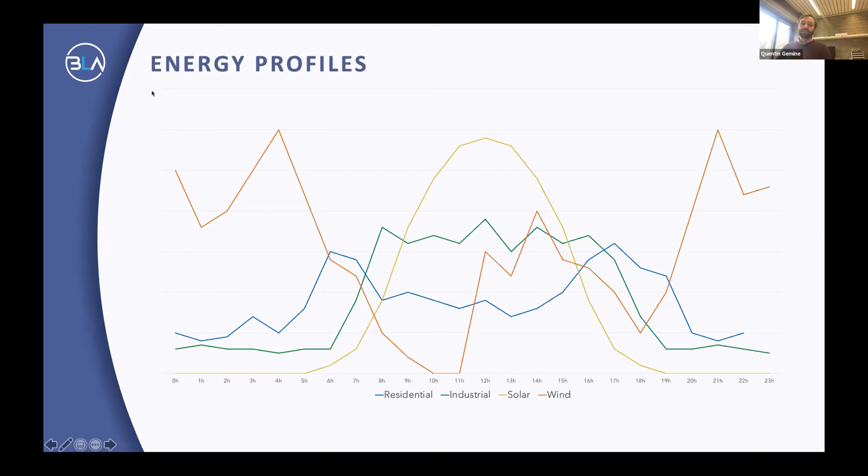Optimizing the behavior can be defined in different ways. Here in the presentation, I will consider that what we want to do is really minimize the sum of electricity cost of all the community members. So you take the energy bill of every member, you take the sum of all these bills, and you want to minimize this amount of cost.

So here we have a formula that is the sum of cost that we want to minimize. I will briefly describe this formula. First we have the sum over time and over all the community members of a first metric, which is actually the supply and grid import price — the price per megawatt hour to get energy from the grid — times the consumption of the grid user minus the community import.

So you remove from the imports from the grid the import you got from the community, and these first two terms multiplied together are what you pay for getting energy from the conventional grid. You also have another cost component, which is the community import price times the amount of energy you import from the community. So one term for getting energy from the grid, and another for getting energy from the community — these two terms fall within the cost category of what you want to optimize.

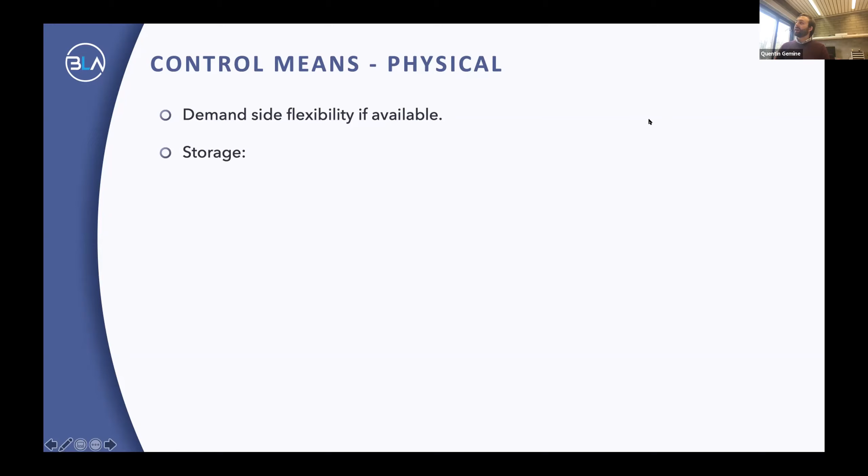So at the beginning, for example, if you have around 50% state of charge, you can both charge and discharge. But as you charge and put more energy into the battery, you will reach the maximum amount of your battery, and you will first have to reduce the amount of power you can put into the battery, and then you will reach, of course, 100% state of charge. You will not be able to use this asset anymore at that time to increase your consumption or to store renewable production.

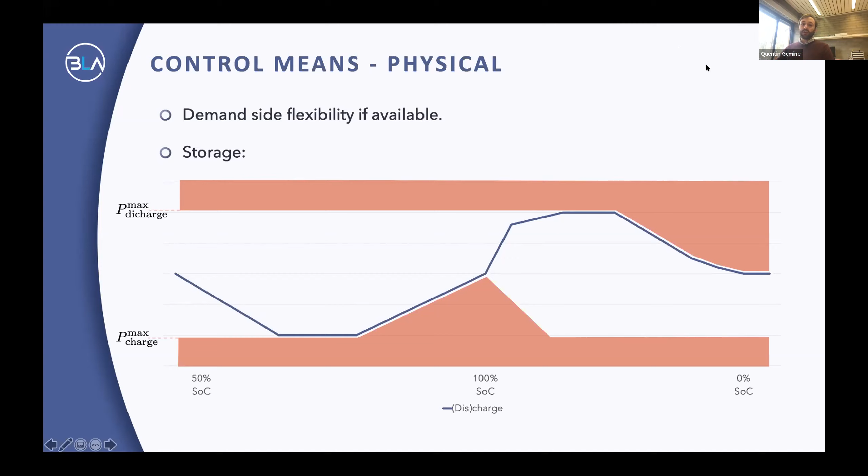And so then, of course, you will be able to discharge your battery and bring energy out of it. At the beginning, you can reach maximal power discharge. But again, over time, as you are getting closer to 0% state of charge, you will reduce your power discharge up to the ultimate point where you don't have any power anymore in your battery. And so it is complex. Why? Because decisions that you take at some time will impact the kind of decisions you will be able to take later on for managing your grid. It's quite a complex flexible asset.

But we also have some virtual control means within the community. So what are they? Basically, it's how you want to allocate your local energy among your community members. And it is virtual because it only affects the metering data. The production process and the consumption process are there, but you decide to match some local production from a specific grid user within the community and say, okay, a share of its production is exchanged with another user, and you virtually update the meters to consider that a part of this energy was exchanged within the community and not through the conventional grid.

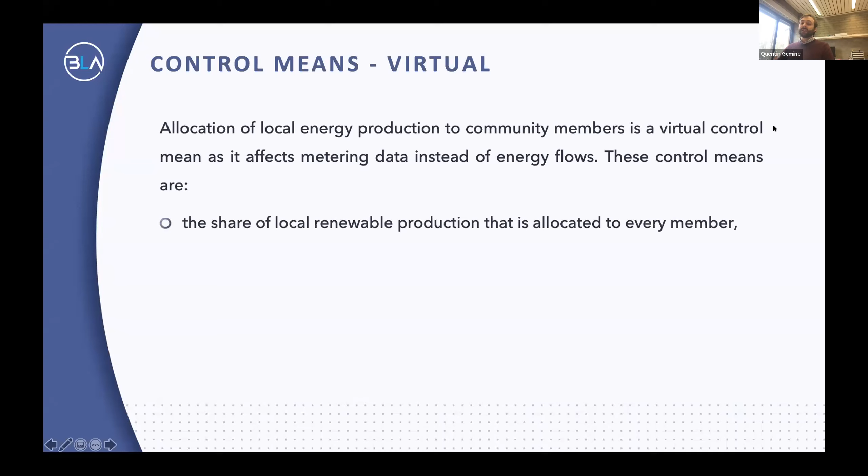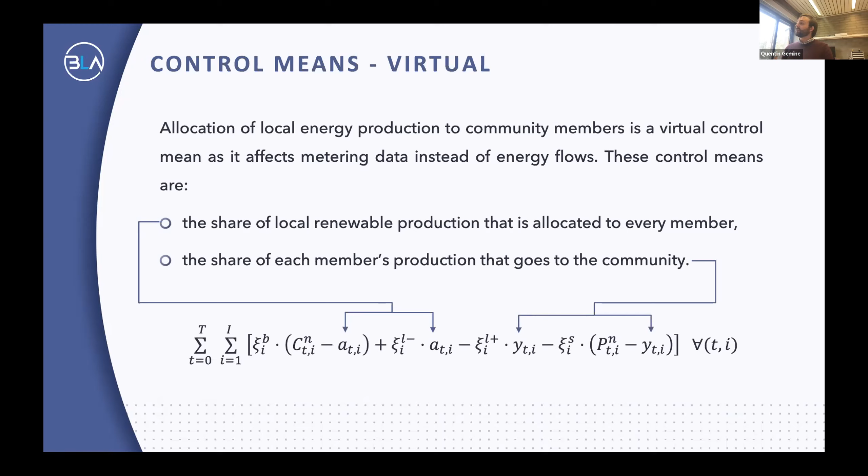And so these control means are, of course, the share of local renewable production that is allocated to every member. Within our equation from before, these are actually the A. So if you decide to allocate more energy to a community member, you decrease its consumption as seen from the conventional grid, from a metering point of view, but you increase, of course, the amount of energy it brings from the community. And there is also the share of each member's production that goes to the community and not to the conventional grid. That's the other decision variable here, and it can again change the production as seen from the conventional grid. So you have P minus Y here to decrease your production, and of course, there is a new term that is the one you are sending to the community.

And so about the optimization, the optimal control you want to apply to manage your system in an optimal way, you can do it in two steps. First, you want to plan both physical and virtual control means under uncertainty, eventually in a receding horizon approach. So what does that mean? First, you will optimize all these terms. You are under uncertainty, and you will say, okay, I forecast that my system will go in this direction. I will optimize my physical control actions, so I will update consumption and production variables by changing the behavior of my users using physical control means, but I will also consider that I can update my virtual power exchanges to really optimize the value of the whole cost function here.

That's the first step. And then, depending on the regulation, of course, you may be able to run an ex post optimization of the virtual control means as soon as you know with certainty all the energy flows. The virtual control means, so the share of energy that you bring from or to the community, is virtual. So you can change it afterwards for metering purposes, for example. You will not be able to alter your consumption and production anymore, but you will be able to play again with a few other decision variables as soon as you know with certainty all the energy flows within your community.

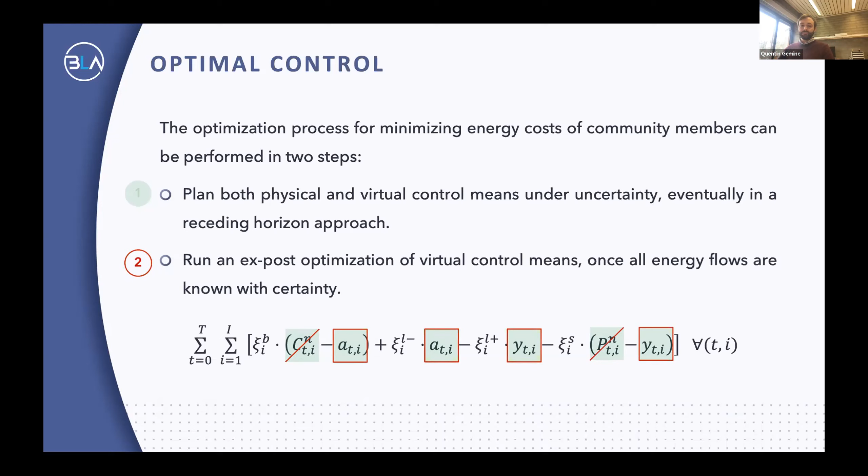And so I will speak a bit about AMEO here. AMEO is a software solution that we develop at Blacklight Analytics, which is dedicated to the advanced management of energy data and operation.

It can collect energy data from many sources, run many kinds of data processing steps and operations, and run forecasting and decision-making algorithms. Managing energy communities really falls within the scope of this solution, because it's really about getting data that describe your community members and taking decisions to optimize the technical and economical operation of your community.

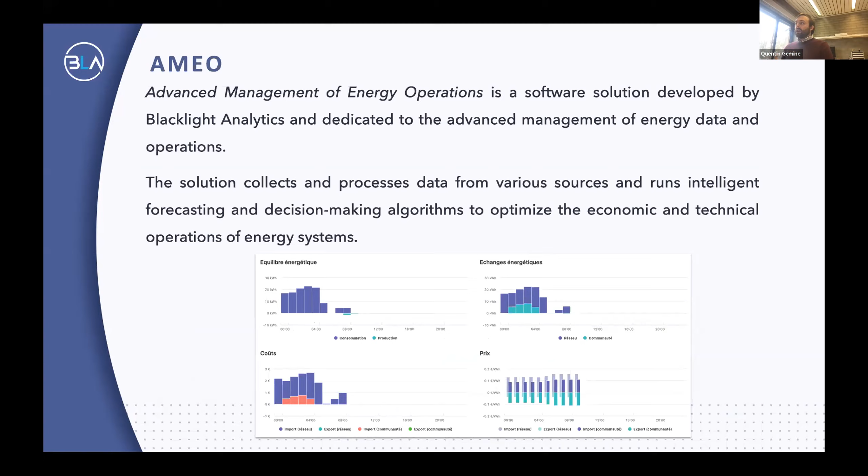So how do we organize and represent a community within AMEO? Well, we have a community within which you have members. A member can be a very simple member with only some demand, but you can also have a prosumer member that has both demand and production, or even more complex ones that have demand, production, and a battery, a storage system, which itself has other behavior and processes like charge, discharge, and state of charge. And you can also have many members, of course, in your community.

As soon as you model and account for all these members and processes within AMEO, you can perform active community management, really make the optimal control work. You take all the demand and production processes, as well as the state of charge of your batteries over time. First, you run a learning algorithm on your demand and production behavior, and you take the learned model and the last known values of demand and production and send them to a forecasting step that forecasts the evolution of demand and production for all members within your community.

This feeds an optimization step that uses these forecasts and the information it has about the current state of charge of your storage system, and outputs decisions, such as physical control means like charge and discharge that are really effective at the current time. And of course, some virtual control means that are for now only the expected local production shares, because you will potentially be able to change these virtual control means later on, ex post. So these are just expected values that will be updated as soon as you have better knowledge about your system in the future.

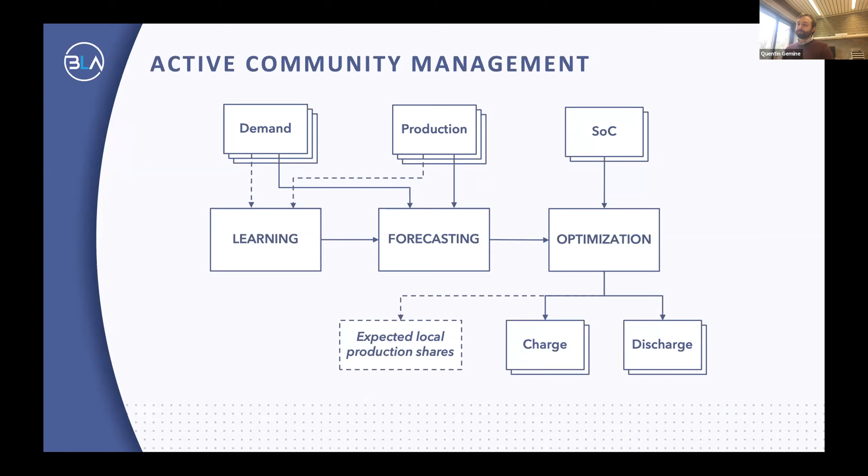This ex post optimization takes again the demand and production processes and runs an optimization step. The difference here is that it does not require forecasting, because it knows everything. It runs ex post, so it looks at past data that is available. It will slightly update and re-optimize the local production shares you computed, and so it gives you the definitive local production shares allocated among community members using the known, certain consumption and production data of all your members.

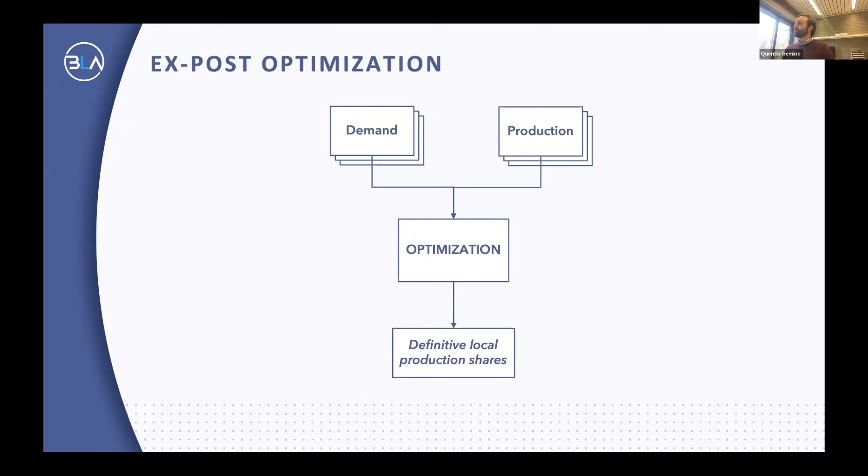This, of course, calls for a lot of R&D and innovation to make energy communities work, and to make them work well in particular. We of course have machine learning. Machine learning is one of the cornerstones of this solution. Why? Because you need to learn and understand how the demand and production processes will evolve over time and in the future, in particular to manage your community optimally.

You have optimal decision making under uncertainty. Here it's really about taking decisions for an expected, forecasted state of your system, not knowing with certainty what you will get, but taking decisions that are optimal even though there is some uncertainty in your system. Of course, it can be built on top of machine learning algorithms and applied mathematics. There are a lot of solutions for that, but it's quite a challenging R&D topic too.

And the last one, somehow related to the two others, is optimal bidding. Why optimal bidding? Because optimizing self-consumption or energy exchange is not the only way to optimize the energy bills of community members. You can also, as a community, decide to interact with energy markets and procure energy at some cost. And these costs, you want them, of course, to be as low as possible.

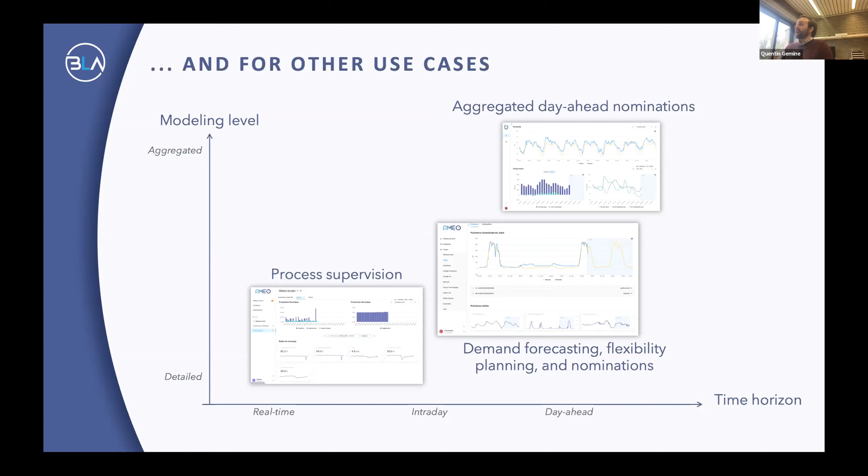As soon as you become an active grid user, you can participate in energy communities, but you can also have some new way to consume, some new way to react to price signals, to play with markets, commodity markets, flexibility markets, and to offer services to grid users. And so it's really a lot of R&D topics that are very useful for managing energy communities, but also for the energy transition in general and for a grid user becoming active, which is really a big topic right now.

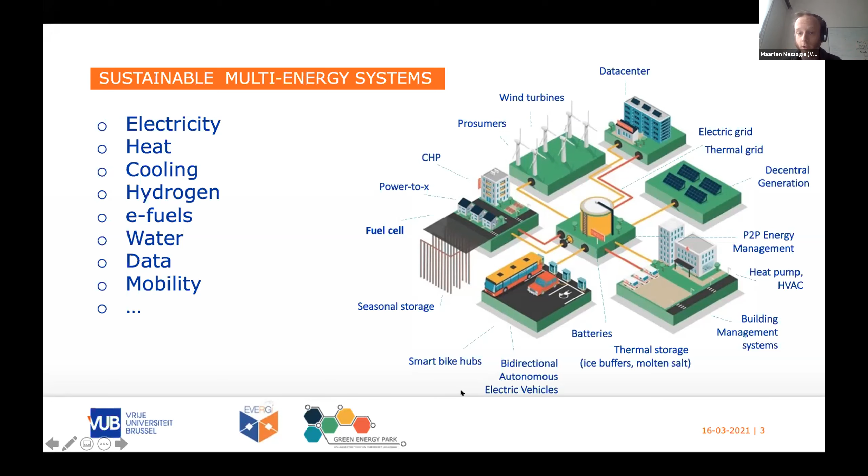Our research focus is actually on the system level and on the interdisciplinarity of it. So we are not only engineers engineering the technology together with industrial partners, but it's also from a socio-economic point of view, from a sustainability point of view, and so forth.

What we directly saw is what we need, and this is also what we saw from being very active in Horizon 2020, the European context. And also from there, we saw that even more so for, back then, the draft versions of Horizon Europe, the TRL, the technology readiness level of these projects goes up. And there is really a need, like we heard in the introduction, to showcase and demonstrate single components. So if we want to be relevant in the future in Europe as well, we need demonstration zones. So we need to build a demonstration living lab.

And for us, on top of that, the knowledge that we would bring lies, in general terms, in data-driven analytics, like we have seen in the previous presentation. It's a huge issue that can solve not only energy management questions, I believe, but many other research questions we would have. So a database and monitoring platform on top of this demonstrator living lab, with a lot of user experiences, is really needed. So early on, in 2018, we understood that this is something we would like to build and really needed to sustain our further research as well, obviously.

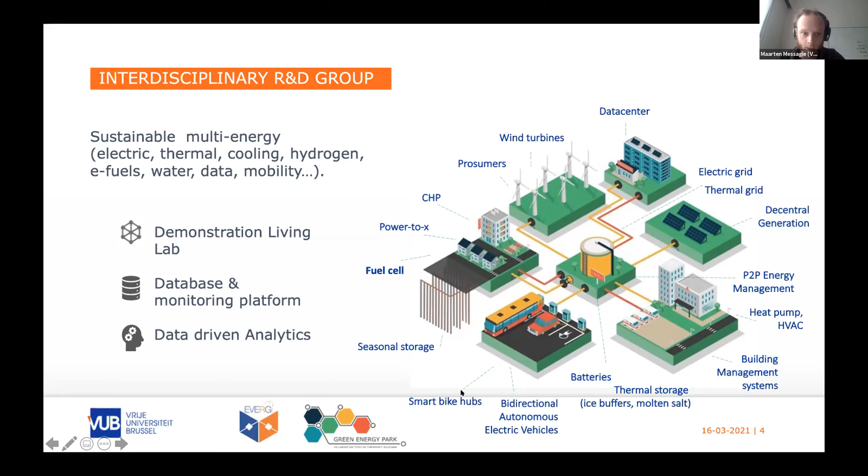But it's not only about that. We can build a living lab, then we have all the hardware, let's say, all the copper in place to play with. It's not only about that, of course, an energy transition in itself also needs a co-creation ecosystem.

And that is why, early on, two years ago, we as a university set up this company called the Green Energy Park, to help this energy transition not only from a traditional research and development point of view, classically your TRL, technology readiness level, from 1 to 6, but really helping close the gap toward full demonstration on the market, which is TRL 9.

The point is that we've seen beyond TRL 9 there is also a great need. We can build super complex systems with data-driven algorithms, IoT, and so forth, but then we also need technically skilled people able to install these components, and secondly, someone who can maintain and restore it if something happens.

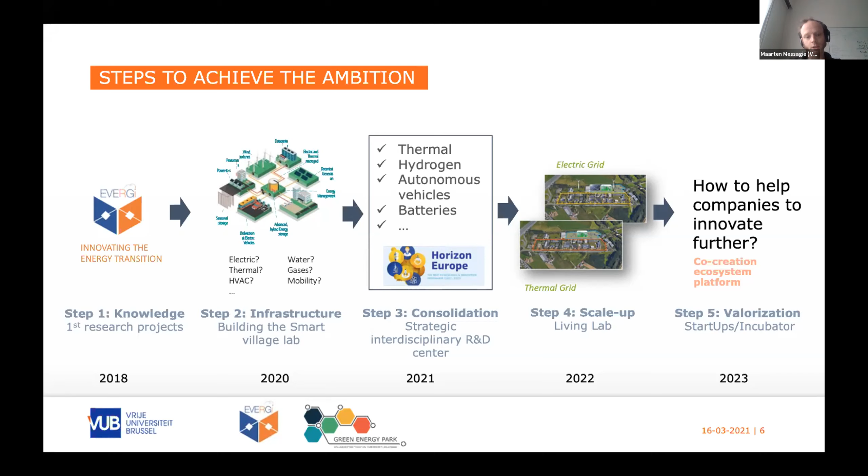So these are the steps we're taking. It's very much a stepwise approach, of course - you try something, you learn, you adapt, and you take the following step. Interesting to see, maybe, how we did that from 2018 onwards. Yes, we can see that in this slide.

We started with doing 6 smaller projects called feasibility studies, together with Flux50 and Vlaio, the regional scientific fund. This really gave us the confidence to invest in research activities one step further.

Later on, we acquired several Horizon 2020 projects like Renaissance and Interconnect. We had many pure R&D projects, icon projects as they are called. Then we also started writing the first Interreg and EFRO projects, which is actually more on hardware. This was the foundation for building that first piece of equipment, the 1 megawatt lab.

During 2018 to 2020, we grew from 4 FTE to 30 FTE at the university in this research domain, in this research group. Very good is that we could start this non-profit organization, the Green Energy Park, to foster even more collaborations. This was a big step for us to convince the university to take that. It makes it less risky for a university to take these kinds of steps.

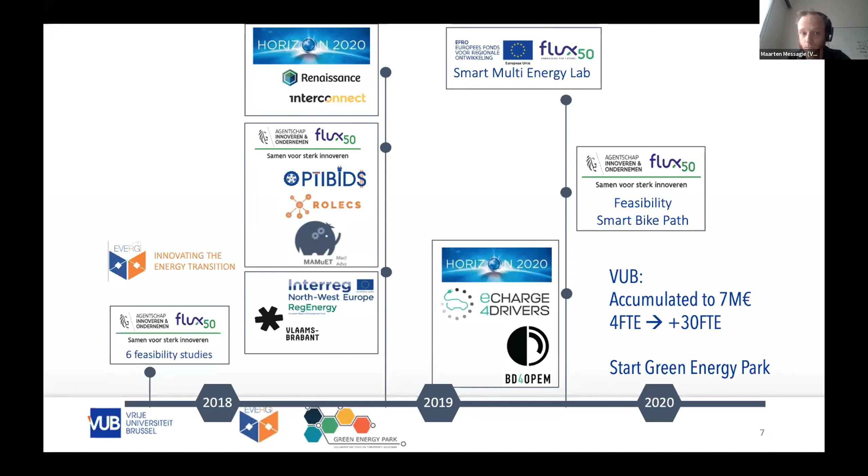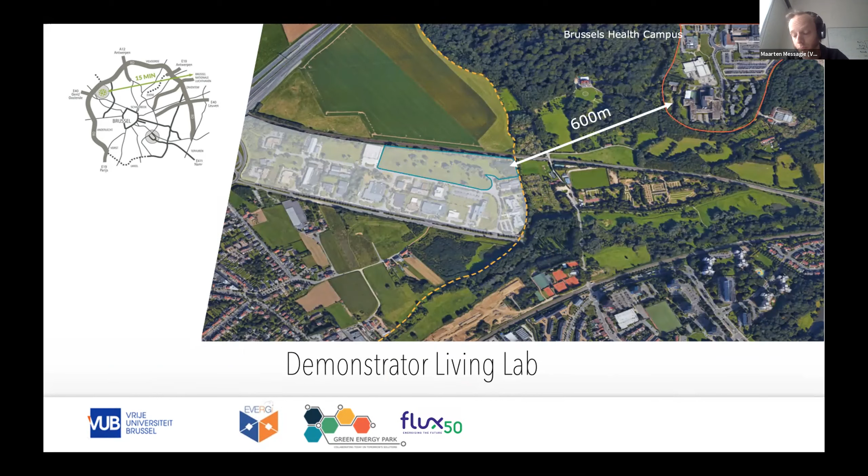What we are building today is the first version of the lab, called the Smart Village Lab. This is the small first step, a 1 megawatt installation. It contains 4 different batteries of different technologies, containerized solutions.

It contains three houses that are fully equipped with what we call the smart home lab, equipped with the newest technologies that you would use at home to heat and electrify parts of your household. This village has a parking lot in the middle, for bi-directional and smart charging things that we would like to test.

Everything is on top of every building. There are solar panels, and a new power distribution grid to be installed. There is a control center where we can showcase new versions of, for instance, EMSs, peer-to-peer constructions, or energy coins that are steering this little prosumer market.

This is an open experimental lab that can be rented by others, with other partners in research projects. The aim is that you rent here, let's say, a square meter to park a car that you would like to connect to battery 3 for a very specific test.

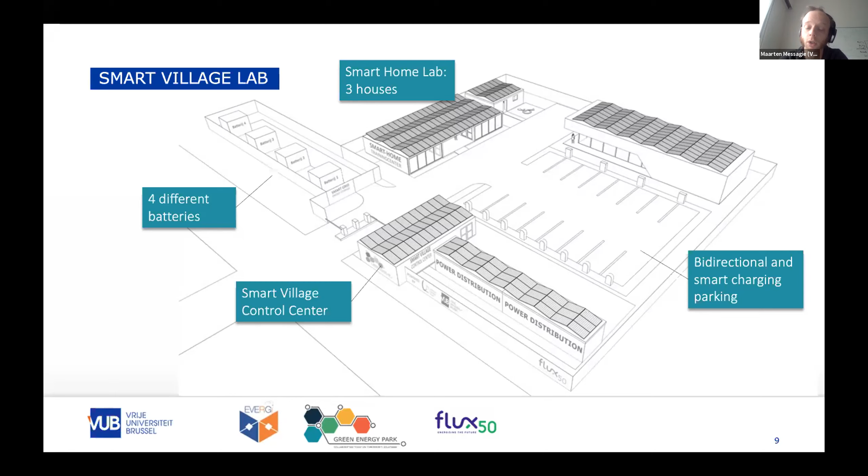And then we would schedule this in a calendar and see when we can conduct that test. So this is a first setup to showcase that we are able to make such a small living lab, that we are able to steer the components. The step beyond this, as I said, this is 1 megawatt. The step beyond this is the full site that we see here. This is really the living lab that we intend to build.

This is a 20 megawatt installation with today 21 buildings connected, with 70 different companies requesting energy. The aim is that there will be a local energy community here, a prosumer market, so that these companies can interchange energy. First of all, that's electricity, because there is already copper installed here.

That's easy. But of course, in the future, we also see this as exchanging on a prosumer market heat and cooling between different buildings. Of course, to build this, there are a lot of extra funds needed. So that's why the previous step was very important, to really prove that we are able to do this.

The small orange area that you see here is the Smart Village Lab, on the blue ground that we have acquired here as a university.

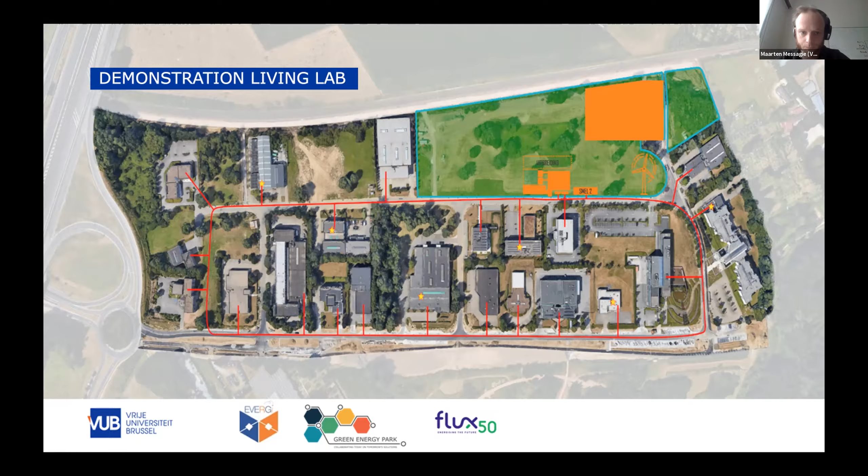Later on, what we are really after in this living lab, of course, is to try to understand the user experience, to understand all the data that is generated by these users, and to try to understand if we can learn something from that and how to help industry with it.

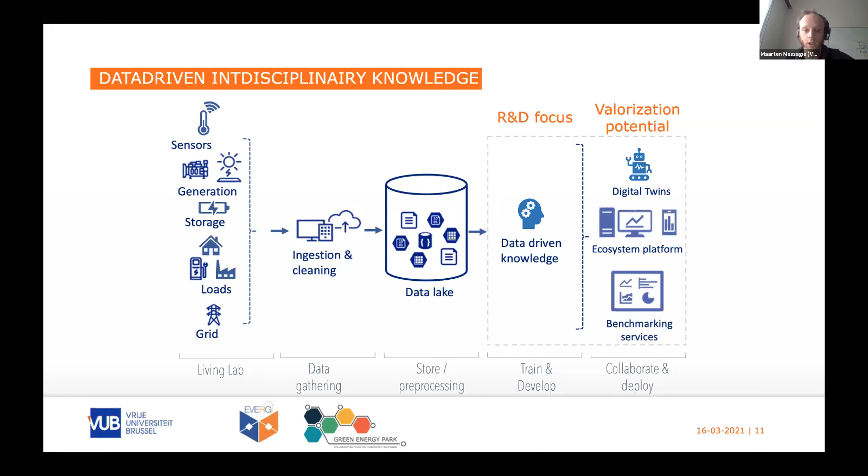So in that living lab, obviously there will be a lot of IoT sensors. We are already installing some of them today. It's all about data gathering and large big data bases, of course. As an R&D center, what we can help with is this data-driven knowledge and how we collaborate today already, and hopefully more in the future. It's about setting up, for instance, ecosystem platforms, digital twins, and other kinds of services.

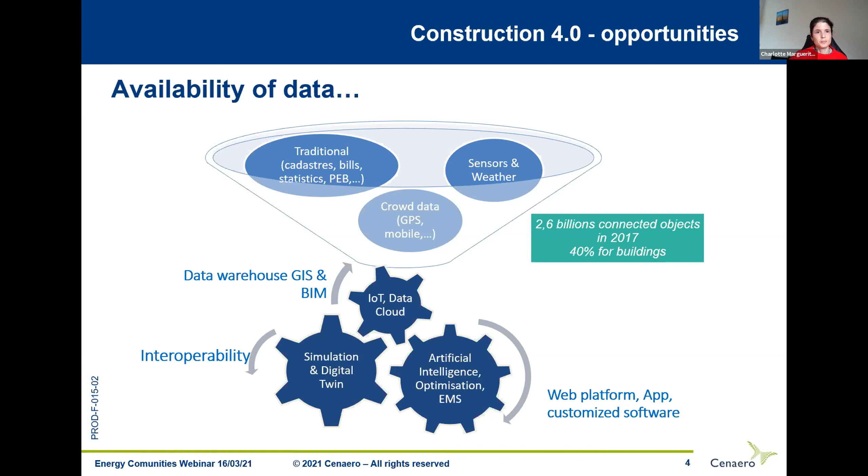This availability of data can be combined with design and operation tools, smart technologies like blockchain technologies, IoT optimization methods. We can, for example, think about building energy models that can be fed with real-time data to create digital twins. This can really help in the operation in a very efficient way of buildings, and combined with energy technologies and, as we talked before, energy management systems.

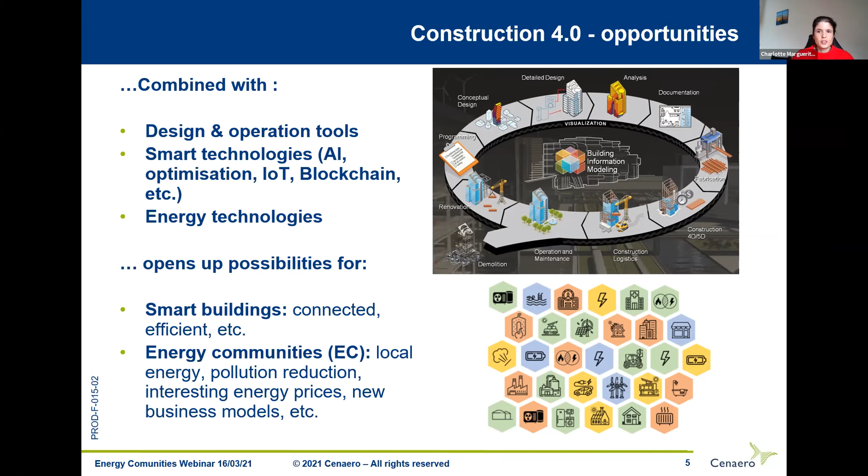This opens up possibilities for more smart buildings and energy communities, which are connected, efficient, and can use multi-energy sources. This gives good advantages like helping reach the energy goals for the future, but also, let's say short term, interesting prices for consumers, for example. With the combination of data and tools, we can have almost endless combinations of energy sources and buildings at the community level, so this has to be managed in an efficient way.

In Wallonia, we are involved in Cenaero in this big project, which is the Wal-e-Cities project. In this project, the objective is to develop innovative citizen-oriented solutions in different topics: mobility, energy, environment, governance, etc. This project is based on data and innovative solutions to create innovative ecosystems, to help in developing new technological breakthroughs, to help in societal challenges, and foster startups in Walloon companies.

Within the Wal-e-Cities project, we have different demonstrators. On this slide I just put a few of them because we have much more, and I will focus for the rest of the presentation. I will give an overview of these projects, these demonstrators, which are in different parts of Belgium, at different levels, from buildings to energy community and to city level. A lot of data is involved, so it's data-driven and energy model-based methods that will be developed for operation control strategies, but also to propose improvement scenarios for the different energy systems.

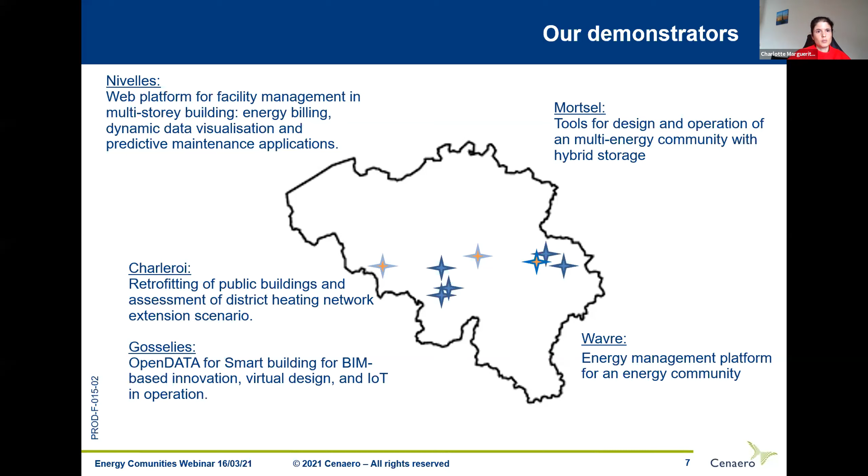So now I will go into the different projects. The first one I want to present is the Smart ACC with a study case in Wavre. So in this demonstration, we want to grasp in real time the challenges and advantages of an energy community compared to traditional energy production and distribution structure.

And compared to that, now we want to move to an energy community structure with a diversity of energy sources and consumers. So we can have traditional houses, commercial centers, schools, or hospitals, for example, with different types of energy needs. We can have producers, we can have consumers, and this involves bi-directional energy flows and, of course, high flexibility of demand and production.

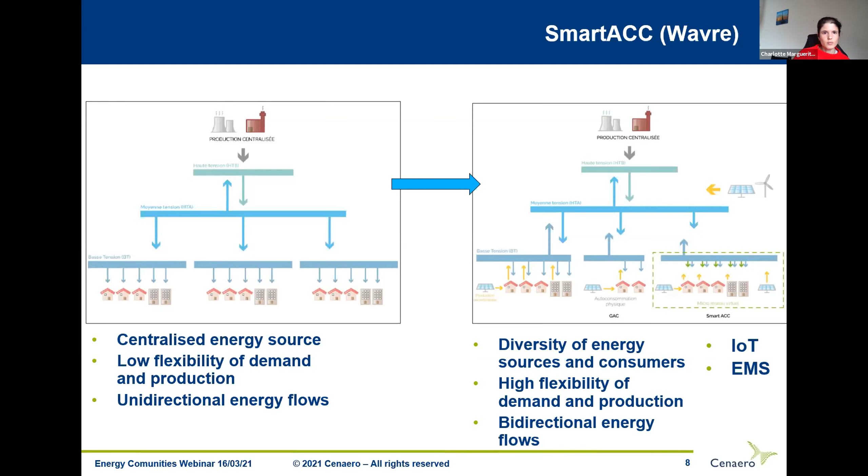Within the energy communities, we will have a lot of IoT data coming from different sources. And this data will be used in an energy management system to help in managing the operation of such a complex community. In the Smart ACC project, the demonstration is located in Wavre and composed of different types of consumers. So we will have residential buildings, tertiary buildings, and also commercial zones.

And the objective will be the development of a methodology for optimizing self-consumption in this local energy community based on hardware and software solutions. So in the hardware, we can use the existing IoT and electricity data set and develop energy models and optimization algorithms for predictive control. The project will allow to develop a platform for different types of users, like electricity providers, network operators, and consumers. And the objective of the platform will be to plan and develop active consumption management and management of dynamic tariffs within this virtual microgrid.

In the project, the optimization of energy exchanges between the participants is the key element. We will first identify and monitor the energy loads that can be shifted and create the models of these energy loads. And then optimization strategies will be tested considering different types of constraints, like physical grid constraints, but also electricity tariff constraints and comfort constraints. And different types of storage will be tested to optimize self-consumption within this network.

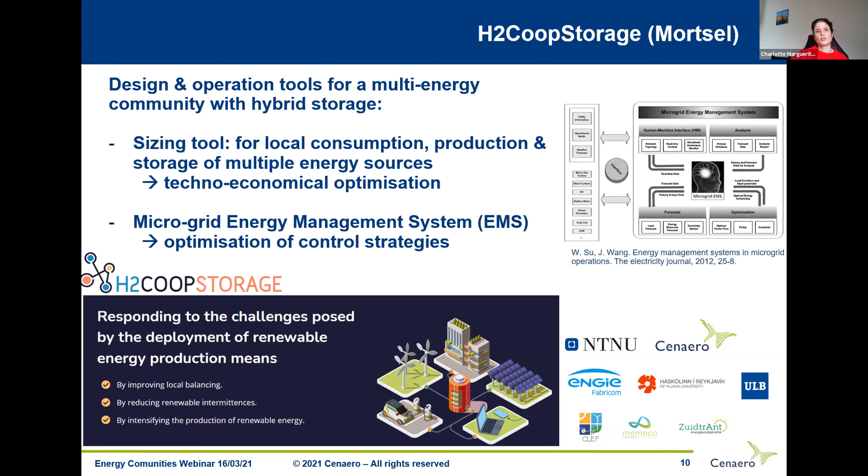And the second tool that will be developed is the microgrid energy management system. This one will be based on an optimization control strategy. These tools will allow the design and management of the energy community, considering the challenges of daily and seasonal fluctuations of the demand and production.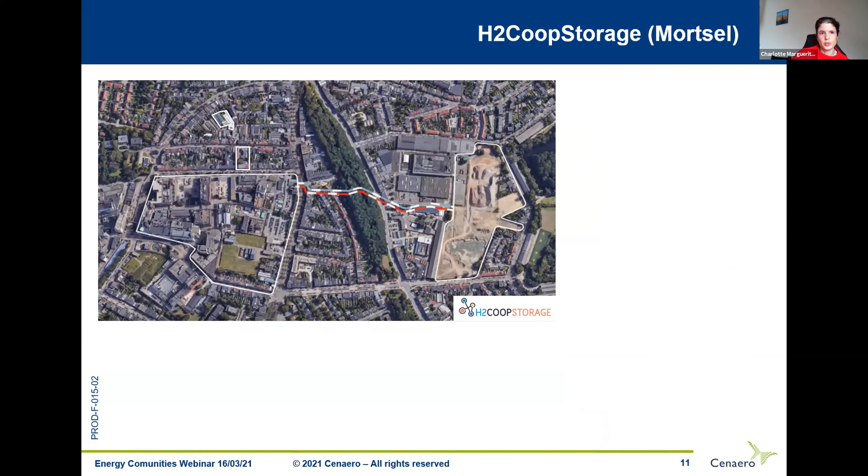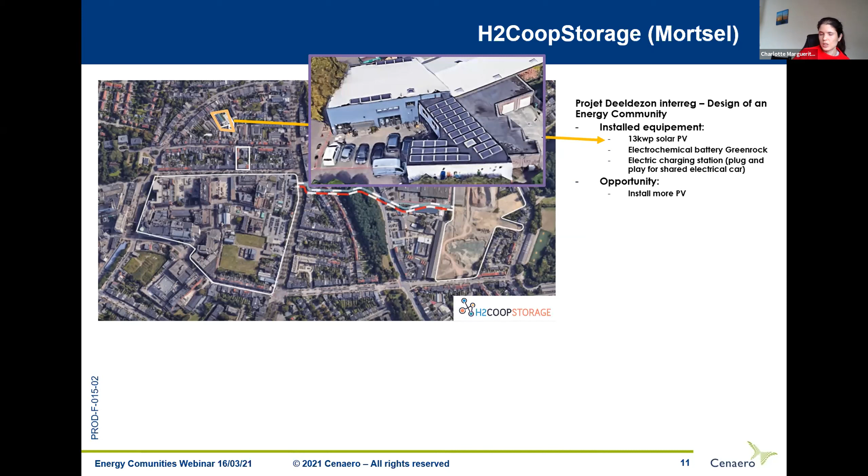The study site can be seen here. It is composed of different areas and different buildings. So the first one highlighted here is the small energy community, with already installed equipment, such as this 13 kilowatt solar PV. There is also an electrochemical battery and an electric charging station for electric cars. And the opportunity of this project will be to install more PV to contribute to the energy community.

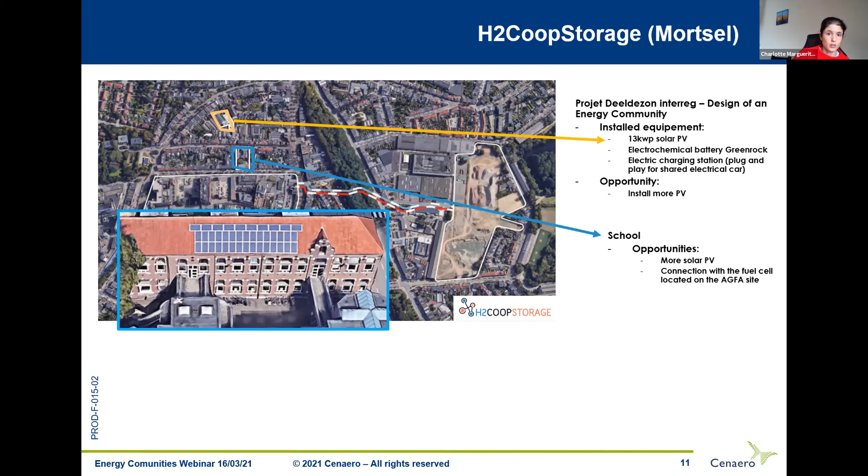Then the second important building for this community is the school, on which we can also install more PV, and it can be connected to a fuel cell on another building. The already existing district heating grid will also be integrated into this community. And there is this industrial site of AGFA where we will set up a reversible fuel cell. And this fuel cell will contribute heat to the district heating network and also help in balancing the electricity grid.

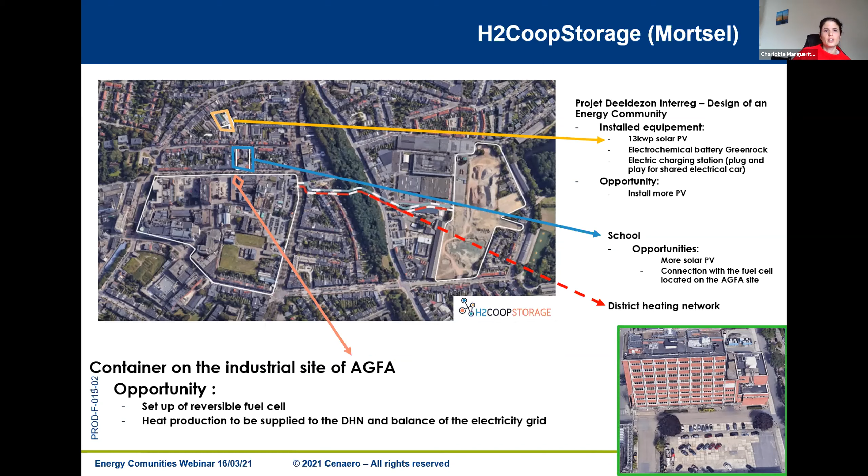Yeah, so that's the different buildings that will be connected in this energy community, and you can see also in the white line there the area supplied by the district heating network. The fuel cell that will be used, I explained in this slide the principle. It's a fuel cell connected to a power box, and the power box is developed by the Solenco company. So on this slide we see the principle of the functioning of this fuel cell and power box.

So there, on the buildings there is photovoltaics installed, and the photovoltaics gives the power needed for immediate consumption when there is need for electricity, and it is connected to a sort of cogeneration power box, and the power box can provide heat for space heating and domestic hot water to the building, and also electricity for the needs.

When there is a production of electricity because of the PV, but no need, then the excess energy can go into the hydrogen storage, and this storage can supply back the power box when there is a need of energy but no production, for example, because it's the night. And with this combination of photovoltaics, power box, and hydrogen storage, the building is completely grid independent and gas independent, yeah, for all the time. That's for the H2CoopStorage project.

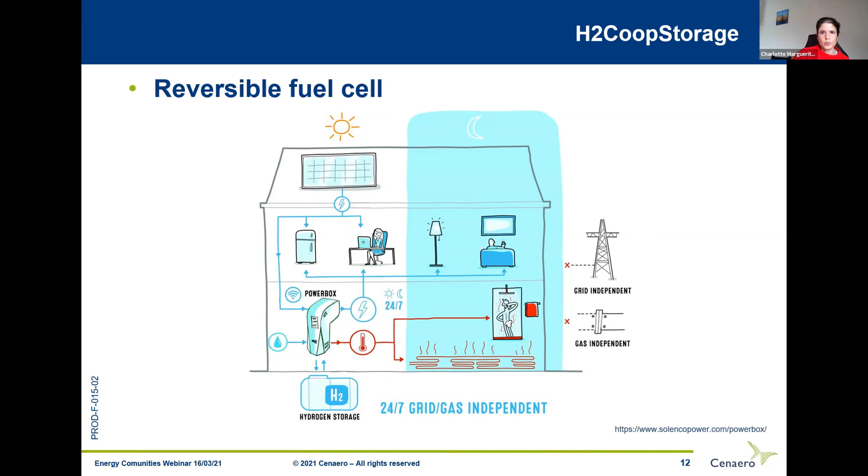Then we have also another demonstrator, which is at the city scale. The use case is in Charleroi. The objective of this project is to develop on one side a big mixed database with data coming from IoT, audit and statistical data, data from simulations, and coming from results of artificial intelligence algorithms. In case of missing data, we will focus on public buildings and schools of the city.

So once we have the big database, we can develop an ICT platform that will be used for energy awareness of the citizens. And this energy platform will also be used for decision making for the public authorities, because we will propose the monitoring of the buildings and data analysis of the energy consumption, but also scenarios for retrofitting of public buildings and scenarios for district heating extension.

Because, as you can see on the picture below, there is already a district heating that is being built at the moment. But as it is in the very city center, it can be extended to other buildings, but it is important to evaluate to which buildings it is interesting to extend it, to not overload the network, or to keep this network interesting from a financial point of view.

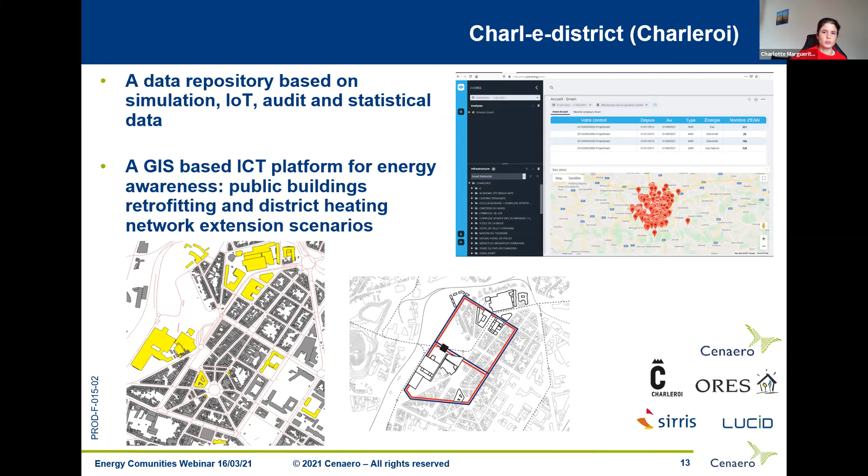And now the last project I want to present is the TPEE project. It's with different buildings from the Thomas & Piron group. And the first building we studied is located in Nivelles. For this project, we use building data for different things, to improve the knowledge of this type of buildings, and be able to improve the future buildings in terms of energy, health, and comfort. And this building will be

IoT sensors and smart meters are installed, and the data will be used for visualization of energy consumption and for energy billing, but also to build predictive maintenance algorithms and create alerts. So the different objectives will be reached by the development of an energy management system for facility management in multi-story buildings equipped with common energy systems, as is the case here for space heating and domestic hot water, but in future buildings also when a cooling system exists.

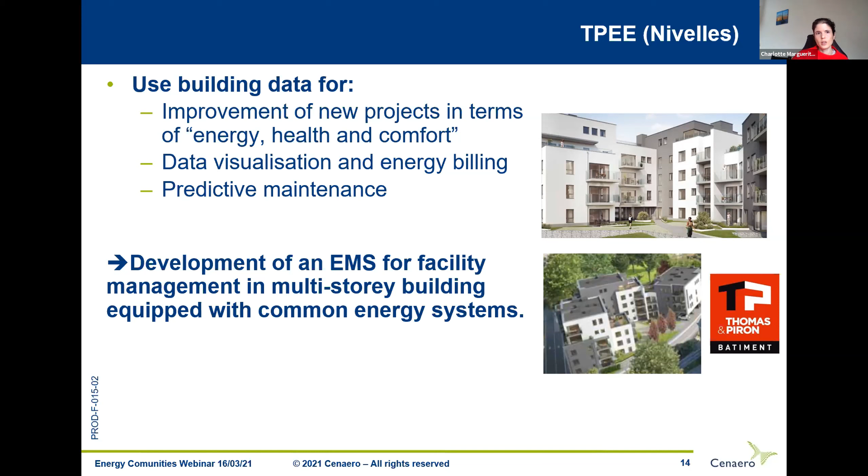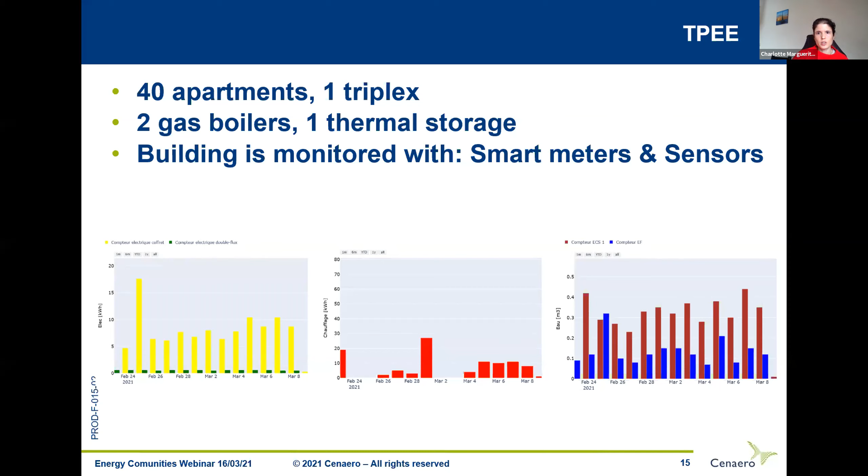And the sensors are also in technical installations to measure temperatures at the input and output of the common boiler, and at the entrance of the different blocks of apartments, and also to measure the temperatures at the entrance and outlet of the domestic hot water storages. All these measurements allow real-time monitoring for fault detection. So we are able, as I said, to follow the evolution in time of the different temperatures.

And with that, we are at the moment developing machine learning algorithms to be trained on sets of data that are available now, so that they can detect and recognize faulty inputs in the future.

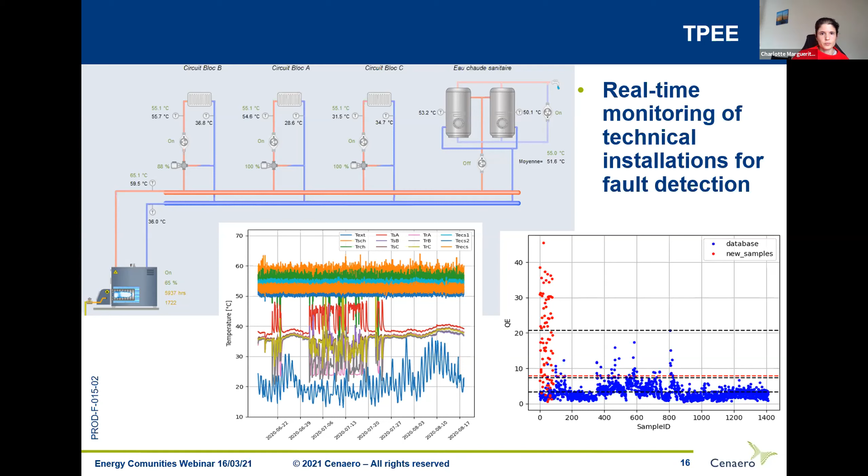In the project, we have different steps and different, let's say, deliverables. I try to put the general methodology on this diagram. So we started from the very beginning by creating the 3D model and energy model of the multi-residential building with OpenStudio and EnergyPlus, to have a model that is able to recreate the energy behavior of the building. And at the same time, we used monitored data and weather data that are stored in a database.

We use this data together with the energy model through calibration to calibrate this model. So it means we want to be sure that the model really represents well the behavior of the real building. So we use data to calibrate it together with optimization, but we used also some, let's say, clustering methods to check that the different apartments behave well compared to the real data.

And once we have this calibrated model, we can use it in a fault detection and diagnosis algorithm. So in these algorithms, we have two parts. The first part is the fault detection. So based on the different sensors and data we have, we can understand what is a general pattern for normal behavior of the different systems, and be able to detect when we have a faulty input. So this is the first part, data-driven fault detection.

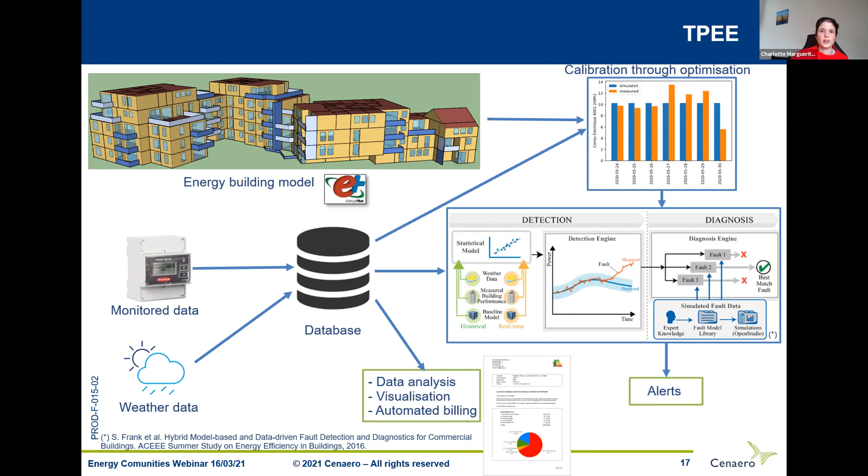Thank you, Charlotte. I have one question maybe for you. We see that you have a platform and a useful tool right now that you have built for several years. How can we use it for next projects? What are the next steps? Are you seeking partners in different sectors or projects that you want to involve to make improvements in your tool? Maybe you can specify that, because some players in the room are providing some projects and pilots. How can we use the platform and maybe go one step further?

Okay, so this platform is developed at the moment for one building, but other buildings can be integrated in this platform, and we can customize it. So we have the general structure that is quite generic, and the platform will be used for different types of inputs. And depending on the building, we can adapt the platform a little bit, and this can be reused for data visualization or alerts or PDF report generation for the customers.

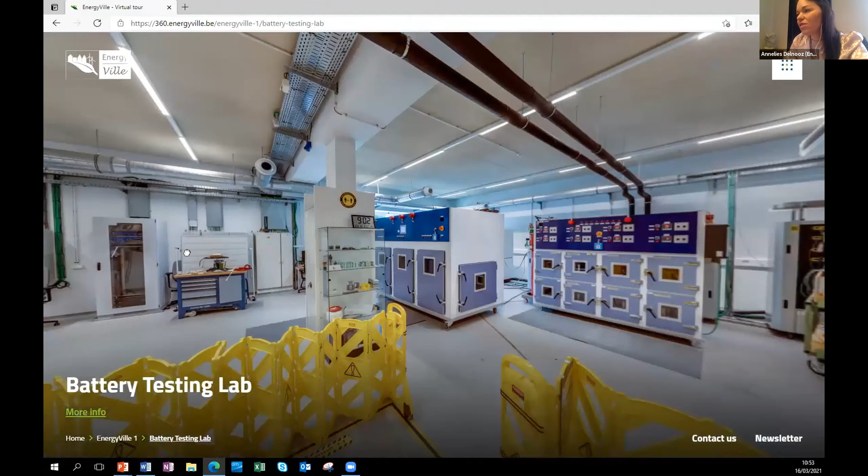Moving towards the battery lab, for example, as you can see here, we have different test equipment here to provide life cycle testing, calendar life testing, tests on temperature.

We also have a lab to test the reliability of solar panels in different conditions. As you can see here, we even have an outdoor PV lab where we have multiple PV technologies available.

As there are various labs available, I would suggest you check them out, check the website, and also the explanation of our lab, which guides you a bit through our building.

Moving along to our schematic visualization of the Thor Park, you can see here an overview of electrical assets. There is a wide distribution of solar energy, EV charging equipment. Next to that, in the Smart Thor project, we developed an appropriate IT architecture, and this facilitates the connectivity of all these assets.

In the past, we bought servers in function of a project, so these projects, in fact, operated independently of each other. In the Smart Thor project, the possibilities of cloud platforms were investigated, and this was developed and implemented in a Microsoft Azure environment.

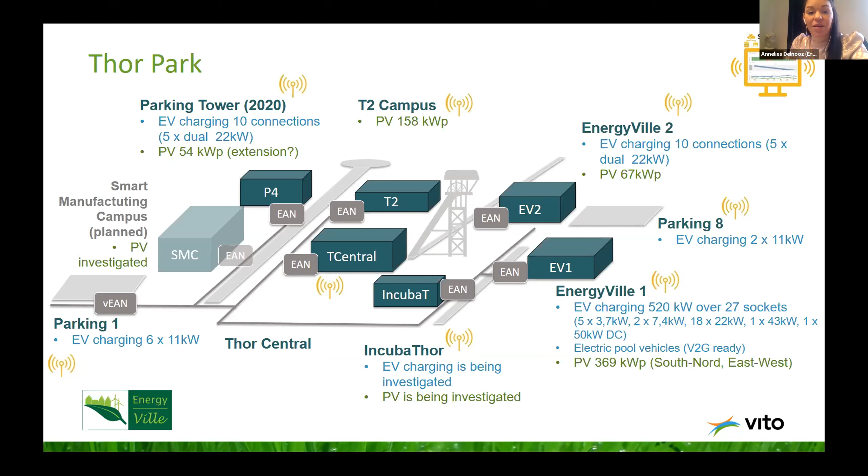The cloud platform of Smart Thor gathers all the data flows, which includes public data, such as weather forecasts, market data, etc. But it also gathers all those local data systems, like, for example, the data coming from our PV installations, the charging stations, but it also interfaces with other systems which we have on campus, which are, for example, HVAC control systems for the buildings. As stated earlier, the Thor Park is recently acknowledged as a regulatory sandbox.

The idea and the vision is that we are a key enabler of experiments with an innovative background. We want to enable all these innovative ideas in an energy context. The regulatory sandbox of TWEED provides stakeholders with the possibility to test innovative concepts and technologies, not just experiment with them, but also in a controlled environment.

It makes it possible to identify which innovative ideas pop up and which technologies are relevant from a societal point of view, but it also guides profound decisions on a policy and legislative level. In the end, the purpose of this regulatory sandbox is that all these experiments and lessons learned feed back into the market and policy environment, supporting position taking on all aspects linked to a sustainable energy transition.

If we move towards the different topics the regulatory sandbox contains, we have the aspect of energy communities, which is an important one, but also thermal networks and DC networks.

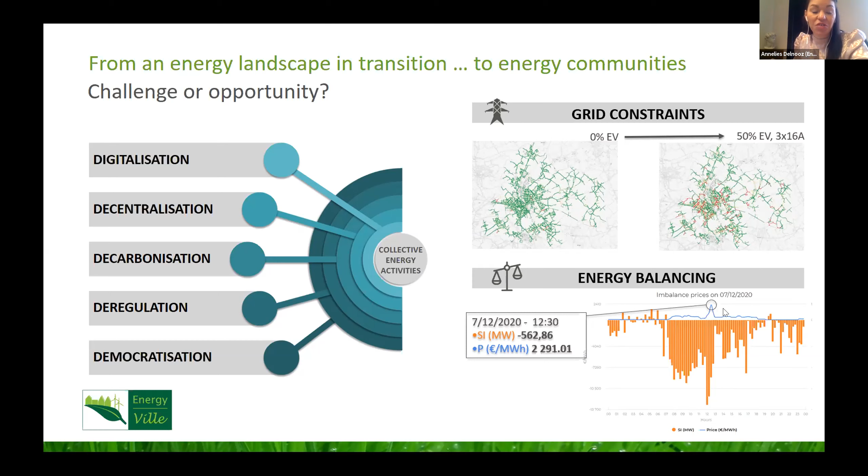These kinds of examples really show that flexibility, and also flexibility from energy communities, will in the end be key. We should investigate to what extent these energy communities can provide an answer to these posed challenges, or maybe worsen the challenges indicated here.

If we consider the concept of energy communities and collective activities in general, there is a certain diversity in concept. The definition of what is an energy community or a collective activity is rather diverse. A lot of concepts have popped up, like microgrids, citizen energy communities, renewable energy communities, active citizens, virtual power plants, and so on. Besides these acknowledged European concepts, alternative forms of collective activities also exist in practice. This makes it really difficult to pinpoint the actual value creation of collective activities.

At EnergyVille level, we tackled this aspect of defining collective activities from three core questions: the who, the how, and the why. Why should we look into collective activities, why should we generate them, what's the added value? The who question: who should be involved, which assets should be involved? And the how: how do we stimulate the formation of energy communities from all aspects involved. For the purpose of this presentation, I would like to focus on the why question - why should we formulate, what's the added value of collective activities?

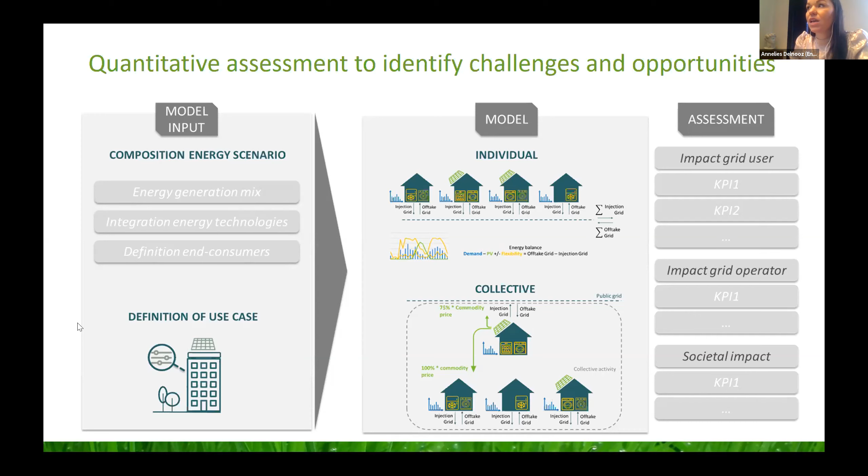If we then move ahead with this quantitative method, we applied it to different use cases. For example, for this presentation, I focus on the aspect of energy poverty. If we calculate all the energy flows collectively, you can see that the grid user impact from an energy poverty point of view can really reduce his energy bill with as much as 30%.

If we then look into the grid operator impact, as from the aspect of constraints management, you can see that providing flexibility to this market is really depending on if your collective activity is considered locally. So only the assets which are at a local level could provide all these services to your grid operator.

It does not make sense, for example, to formulate your energy community widespread across the country if your constraints are only on a local feeder level. So you really have to be located at that level where your grid operator is seeing this impact from a constraint point of view. What's also important is this aspect of flexibility.

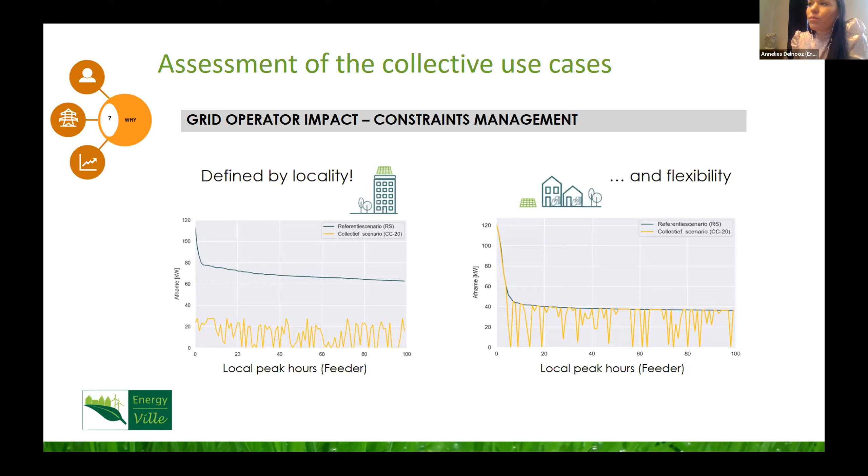We always state that when you formulate an energy community, you either look for complementarity, so making sure that you combine production and consumption in the right manner, or you will be looking for flexibility. And those two purposes can really drive or increase your added value as an energy community.

If we then look at the energy balancing perspective, we can conclude that this market is in fact already open, or is really in the process of opening up for all distribution grid connected flexibility sources, regardless if you're forming an energy community or not.

We know that, for example, aggregators are already popping up in this market at low voltage levels, providing the flexibility to other market participants. So being an energy community is not really a prerequisite for actually participating in this market.

What is important, however, is that we guarantee that all the conditions are in place to make sure that energy communities are engaged with the grid. In this context, we must assure that this triangle of signals - the grid tariff, your commodity price, and even your flexibility signal - are providing enough incentives for your energy communities to turn out to be grid and energy system friendly.

In order to test this interplay between the grid, the commodity, and a flexibility request, we played a bit with different grid tariff designs. As you can see here, an example of two which pinpoint how they can impact really the market.

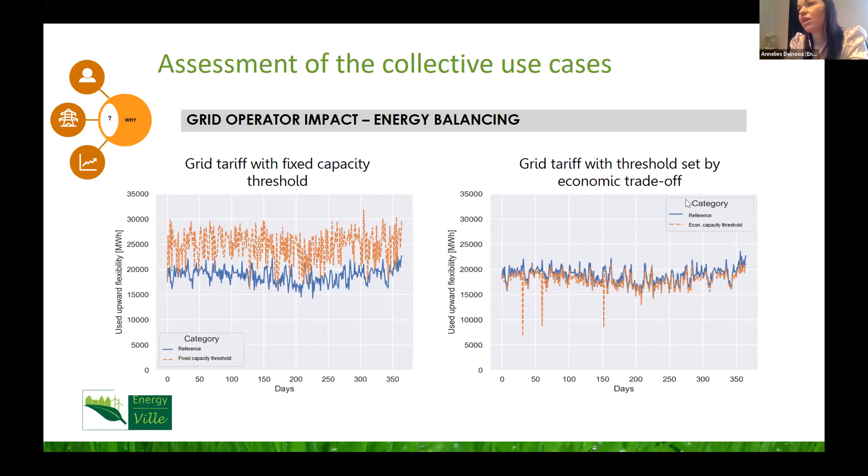If we then move to the second part, which is this thermal network at EnergyVille at Thor Park, we see that heat and cold in general are important energy carriers in the transition. And that's also acknowledged by Energyville. That's why also at Energyville, we have developed this 5th generation thermal network at Thor Park. This thermal network, which is called the CollecThor, aims to provide an answer to those challenges.

So the existing buildings at Thor Park - Thor Central building, the incubator, Energyville 1 and 2 - they will be coupled on this thermal network. And the buildings yet to be established, which are a couple of 8 lots in total, will also be connected to this network in the longer run.

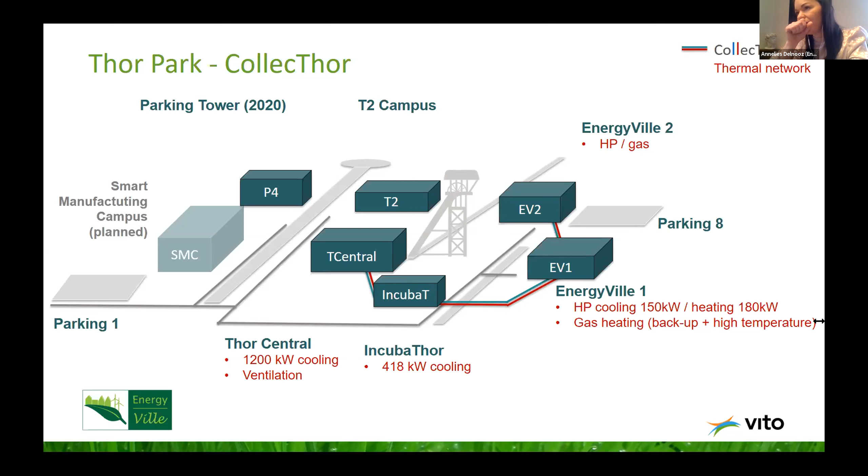The intention is to heat and cool our buildings sustainably with geothermal energy and to exchange the residual heat and cold with each other to the max. The concept is developed to be extremely modular, and this allows the system to grow and develop as new buildings are implemented on the Thor Park.

In contrast to the thermal networks that are rolled out today in Flanders and usually also in the rest of Europe, we allow this modular approach, making it more adaptable and future-proof.

One of the most important aspects and innovations in this concept is that we also developed an intelligent control system. And it's thanks to this system that these geothermal resources will be used more efficiently.

We will also have additional services and flexibility available, for example to be used in the electricity grid. This makes it a smart control, modular approach, future-proof integration and implementation of a heat network at the Thor site.

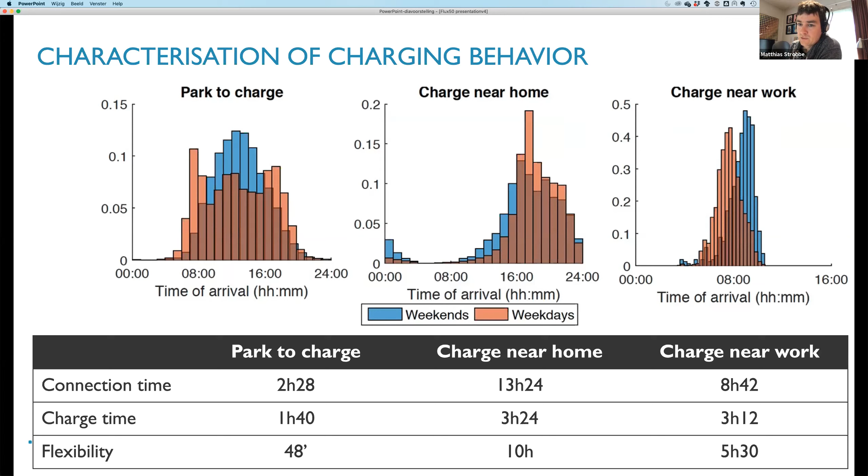Also, the charging near work during working hours has quite a lot of flexibility during the day. Then the blue cluster, where people just charge their car and do something in between, has the least flexibility and is less interesting to be used for demand response applications.

The next step was investigating how we can use that flexibility for demand response—how can we shift the charging, take into account the energy needs and the time the users want to leave again, and then use that flexibility to solve objectives relevant in the broader energy system, but also for local energy communities.

For example, trying to flatten the loads and the peaks in your community so that you don't have to import large peaks from the public grid, which could mean large costs for your community, or try to balance local energy production with local consumption so you can become more independent from the public grid, or to avoid other technical issues in the grid, like voltage violations, congestion, etc.

So we first investigated, with the flexibility found in those charging profiles, if we know everything perfectly—if we know perfectly when the cars will arrive, leave again, and how much energy they need—to what extent can we reach these kinds of objectives?

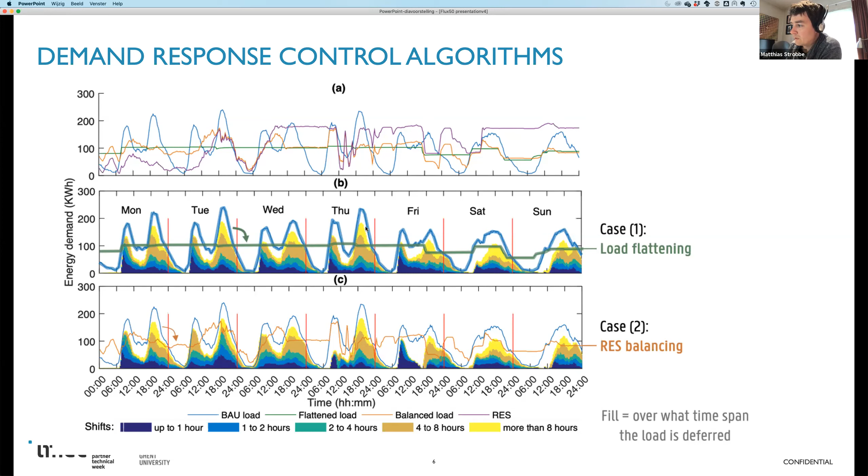Of course, in reality, you don't know exactly when the cars will arrive and leave again, how much energy they will need, how much flexibility the users have, etc. So you need to design algorithms that can take this uncertainty into account and that can come up with a charging policy that is as good as possible. It will never be perfect, of course.

And then the next step, designing these kind of charging algorithms that can be really used in practice. There we looked especially in our recent research to a technique from AI, which is called reinforcement learning, where the goal is in fact that you have an agent that learns by processing data what are the best control actions to take in a certain situation. So in the beginning, the agent is very dumb, and it just takes random actions, and based on the outcome of those actions, if they are good or not good, they get a reward or a penalty. And so over time, they learn what a typical charging policy is for a certain environment.

So it's pure data driven and has the advantage that you don't need to manually create models of, let's say, distributions of typical arrival times or energy needs, etc. It's all implicitly learned by the agent, which is nice because it's pure data driven. It can easily be applied to other locations with other contextual circumstances. Of course, on the other hand, you need to have enough historical data. That's a drawback. But also there, we are investigating how we can reuse trained models from a certain location in another location so that they don't have to be retrained completely from scratch, but some information from a similar environment can be reused.

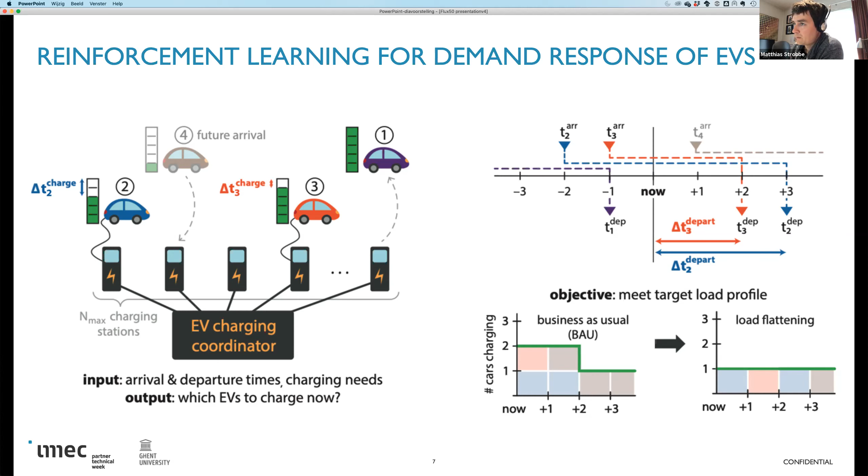This slide shows a bit more in detail how the algorithm works and how the trajectories are learned through the overall state space based on the input data, but I won't go too much in detail on this one.

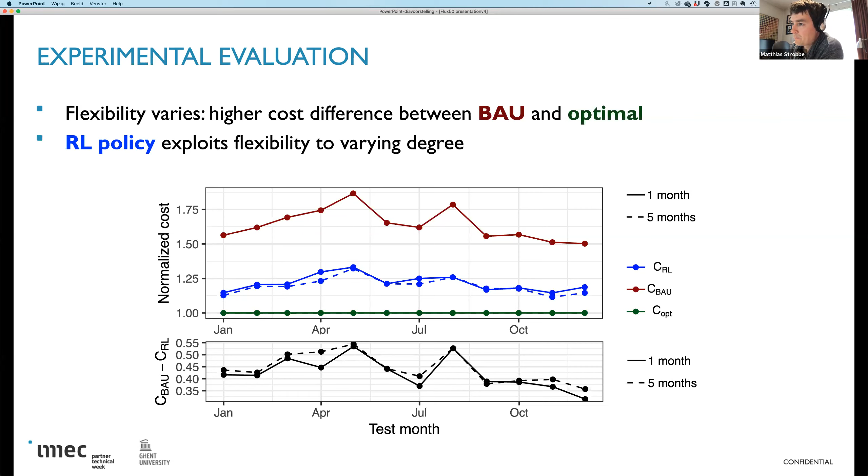Another research activity in the energy domain where we also use AI techniques, which can also be interesting for energy communities, more towards residential end users, is NILM, which stands for non-intrusive load monitoring. So the idea is that you measure the total energy consumption of a household and then try to disaggregate that energy consumption into the consumption profiles of the different appliances in your home. So if you measure that consumption at a high frequency, you can derive particular aspects of different appliances that are turned on and off. You can learn that also using data analysis and AI.

And of course, the benefit is that you only have one sensor, but still have a lot of information about those different appliances in your home. You can give detailed advice to the end users on how they can improve energy efficiency, what their standby consumption is. You can maybe even find devices that are not working very well anymore, identify anomalies, maybe detect old devices that might be replaced by newer ones that are much more energy efficient. And it can even teach you something about typical activities and presence of the users in the home, which might be interesting for very different applications, more in the domain of comfort and security and even healthcare, to, for example, follow up older people at home.

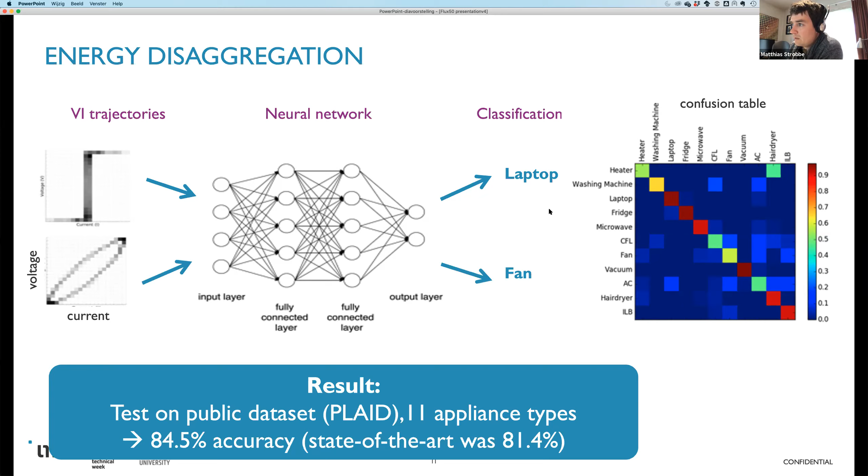One of the tracks they're working on right now is improving efficiency of bifacial solar cells, where reflected solar light is also used to generate power. Another domain that they're working on is energy storage, so creating new types of batteries based on solid state lithium ion, which has the promise of a higher energy density, but still has some difficulties to produce on large scale.

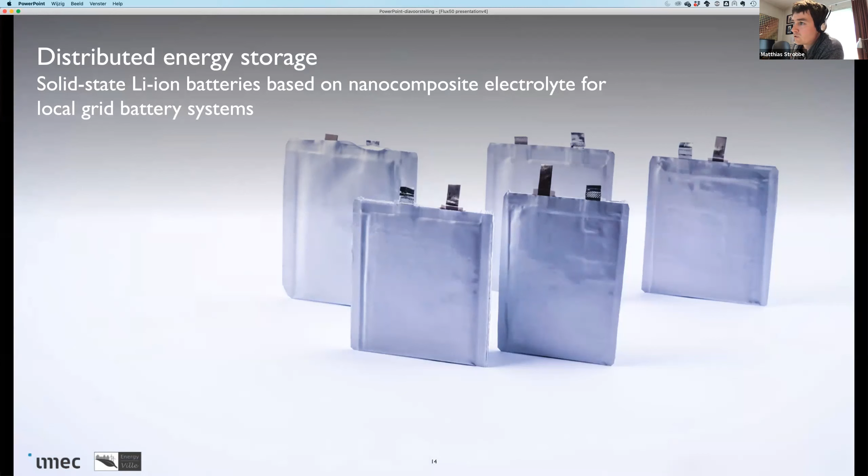But they're also working more on software aspects, and one of those things is they created a very accurate prediction forecasting model for PV panels. From their knowledge on the hardware, they created a physics-based model that can very accurately, on a local scale and on small time scales, predict how much energy the solar panel plant will produce.

They also use local cameras to detect clouds in the sky. They also take those aspects into account. And as such, they can very accurately get an idea of how much energy can be expected on a certain location, for example, a local energy community.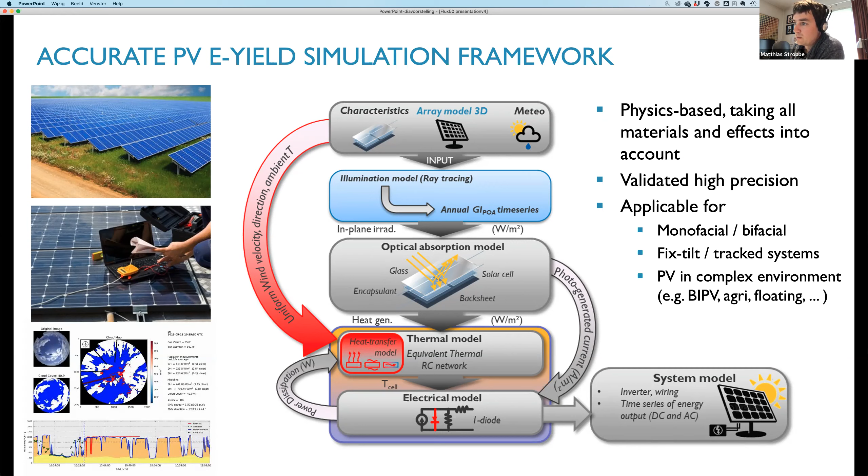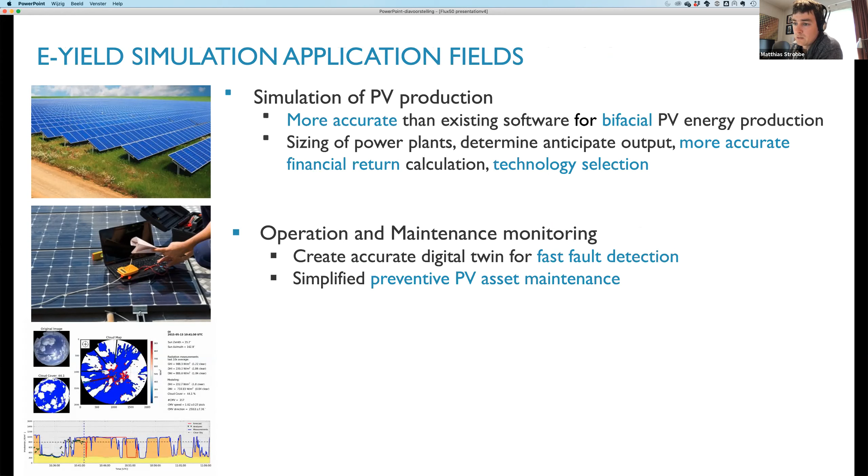With such a tool, you can easily simulate beforehand, before you install PV panels, what the production will be. You can also use it to improve operation and maintenance. If production is lower than expected with your model, there might be a problem locally that you should try to solve. And as said, it allows you to do short-term forecasting and can then be linked with a local energy management system to optimize, for example, also flexible assets, as mentioned before.

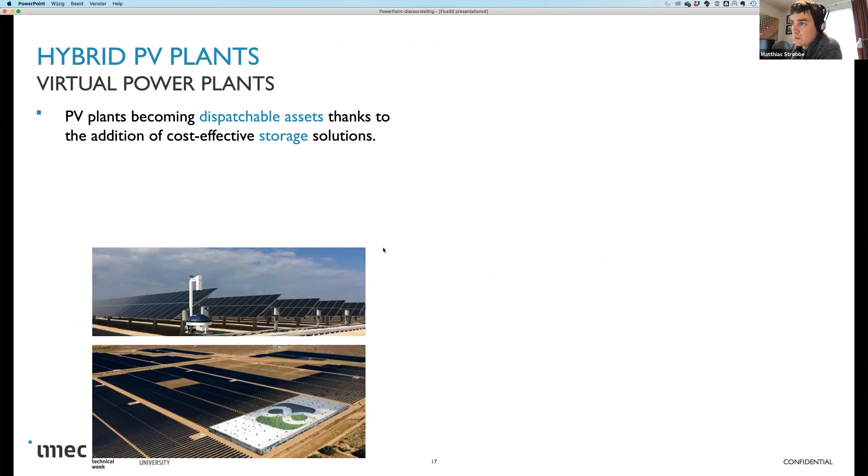We're also looking at combining this PV forecasting and monitoring with batteries, which allows you, for example, for a community to have a much smoother profile of local production instead of a fluctuating profile if there are some clouds, or to even deliver ancillary services locally or more globally to the public good.

As a last part, I would like to mention a few research projects where we are involved that are going on in a few energy communities in Flanders, where this research is applied. The first one is a city district in Antwerp called New South, which is a large project where a lot of apartments are built in different phases. You can see it on the top figure, and it's quite big buildings that are built there.

If you drive from East Flanders to Antwerp, and when you come out of the Kennedy tunnel, you can see those buildings at your left side. It's very close to that point of the highway around Antwerp.

And there's a research project going on there where we are involved called Circular South, where we try to create a real community with the people living there that is very sustainable, very circular. So we monitor energy, but also waste production, also water consumption of those people.

And then we give them detailed feedback via an app and give them tips and nudges to try to improve their energy efficiency or to maybe reuse materials more and really change their behavior. We also use blockchain techniques to give them circules as a kind of virtual currency if they do well, which they then can use to buy some city services together with the city of Antwerp.

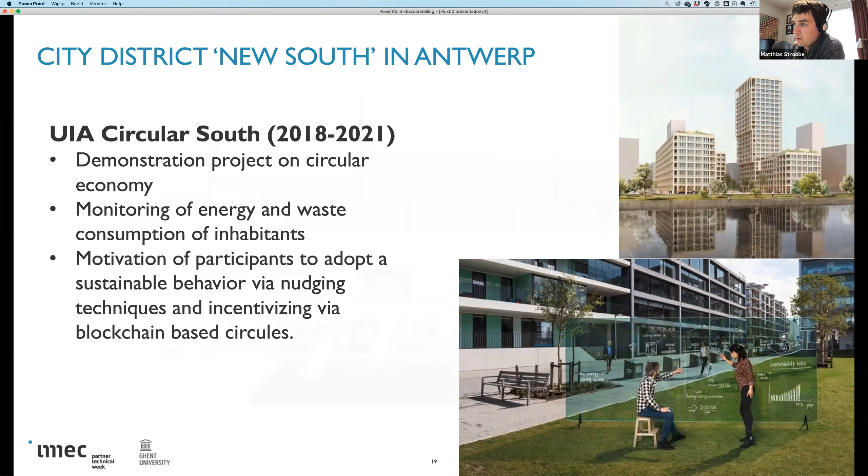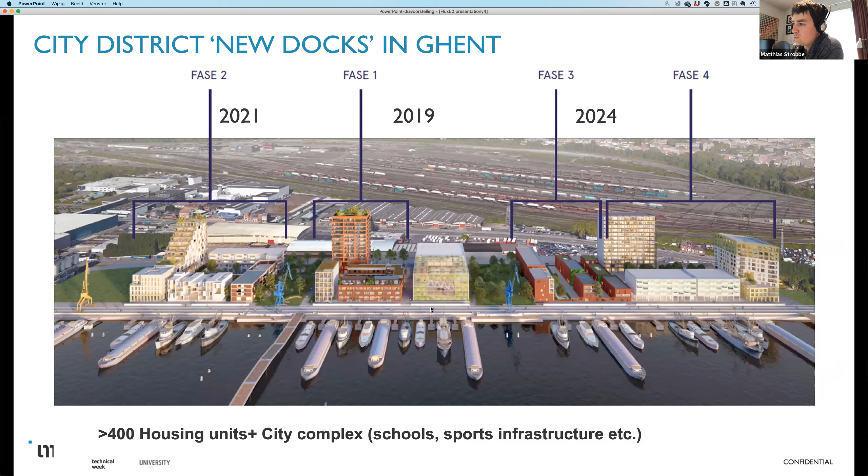Another new city district that is under construction is the New Docks in Ghent, also in different phases, as you can see on this slide. Mainly housing units, over 400, a few offices, but also a city complex, a school with some sports infrastructure here in the middle. This cube is a school with sports infrastructure.

Here you can see how it looks currently. So the first phase in the middle has been finished, and the first people are also living there now, and the school is already used. The city district has been designed from the start in a very sustainable way, also as a multi-energy district, as other districts have been presented already today, with a heat network where waste heat from a nearby company

is reused. But they also process wastewater from the city district and extract heat from that to be reused for heating the apartments. Also, the processed water is then reused by this company. Some nutrients are recovered from the waste and used to improve the soil. They also look into mobility, electric bikes, electric vehicles, electric cars, also sharing of cars, etc.

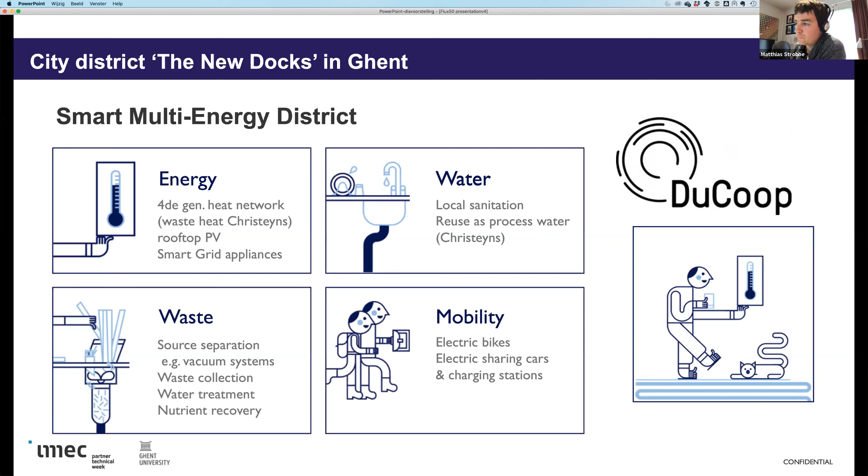So they try to optimize as much as possible and are also constantly looking for opportunities via research projects to even further improve sustainability of this district. And together with them, we are now involved in 4 research projects where we analyze aspects to further improve, let's say, sustainability of such a local energy community.

I have to say that all the inhabitants are part of a local, how we call it, kind of community and company, in fact, and they also have, let's say, shares of all the common energy systems. So all the inhabitants are also motivated in that way.

The first project is the Flux50 Icon project, a local project called ROLECS, where not only in this location but also in 9 other pilot sites in Flanders, we investigate how local energy communities can be set up, and what the impacts are technically, economically, regulatory, but also for the end users.

Then there is a large demonstration project, Horizon 2020 project Interconnect, where the focus is more on interoperability, communication and the data models to be used to communicate with flexible devices in buildings, in houses, in these kinds of districts for energy services. So how can you better connect energy grids with buildings? How can you more easily communicate with all kinds of assets from different vendors? And especially SAREF is investigated there as a data model.